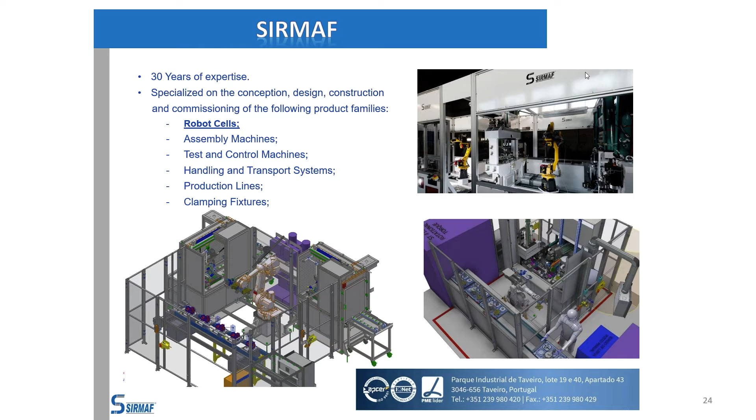SIRMAF has 30 years of expertise. We are specialized in the design, construction, and commissioning of these product families, focusing on robo-cells. These images show our solutions, their design and construction. On the next slides, I will show you some examples of SIRMAF robot cells.

In this case, this robo cell was developed to assemble, bolt and lubricate customer product. We have man/robot interfaces for loading and unloading stations, different stations for different product families. We have automatic feeding of some parts.

We integrated 3 FANUC robots. The robot brand is normally a customer specification to which we adapt, and we integrated all the programming for the 3 robots to work together. We developed the grippers to have quick changeover for different customer product families.

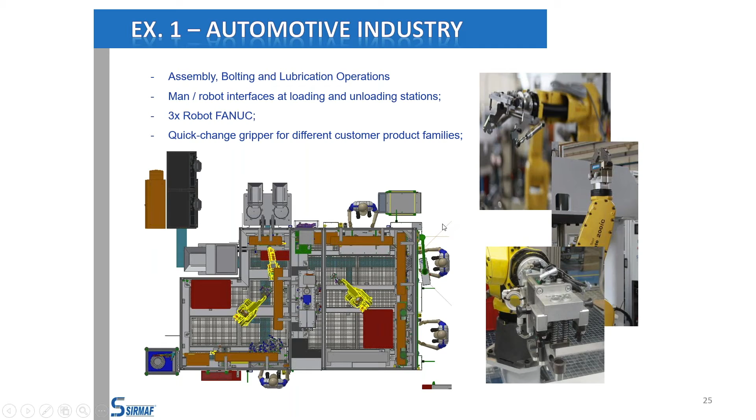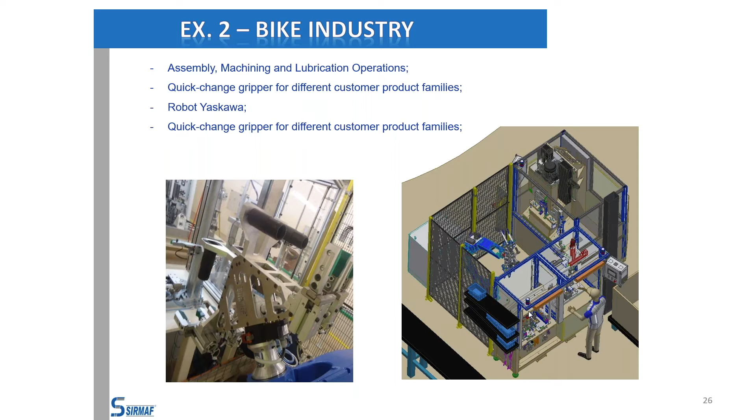On the next slide, we have an example for the bicycle industry. Here we developed it to assemble components, to machine the parts, and to do some lubrication of the component in the end. The gripper was developed to have a quick changeover for different custom product families, and we also have an interface between man and robot for loading and unloading stations.

In this example, we have a robo cell that we developed. You can see here the image of the design to do the assembly, bolting operation for the 5 wheels of a car - the 4 wheels plus the safety wheel. This was a big innovation project and a big challenge. We have a huge variety of wheels, imprecise feeding of the wheels and of the car, and imprecise positioning of the car wheel hubs, so that we can assemble with the robot in automatic all the wheels.

In this case, we developed a system where we integrated 3D vision to scan the wheels and the wheel hubs, and we automatically program the robot trajectories so that the robot can match the bolts on the wheels and the wheels on the car hubs. The solution was based on 2 ABB robots, and we integrated the cameras and the nut runners on the robo gripper.

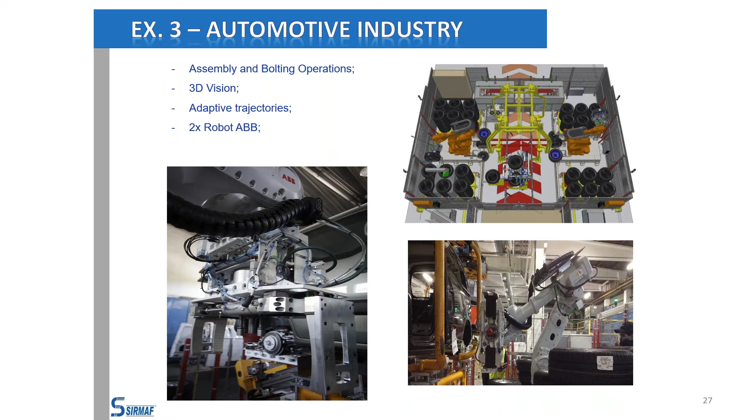Machine directive compliance is mandatory in SIRMAF's quality management system. RoboCell machine directive norms and safety solutions for RoboCells are evolving. These past years, we would like to highlight the transition that we followed, which we see as a good improvement: from hardware safety solutions to safety by software, using safety PLCs and software like SafeMove, in this case for ABB.

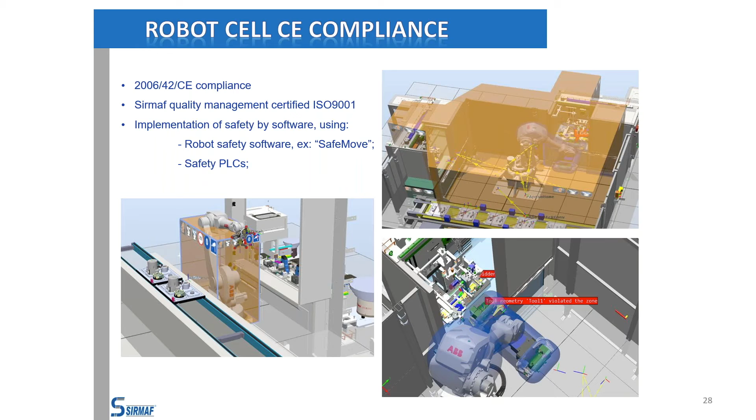These being examples of what we do at the moment, I'd like to also share with you our vision for the future. Aligned with Industry 4.0 main guidelines, our vision for SIRMAF Production Systems 4.0 is based on the integration of machines, robots, vision systems and AGVs with a modular concept for safe, flexible and connected solutions, reducing customization to product, machine and MES interfaces and specific customer requirements.

Also, with this, opening new opportunities to change to a new revenue model like machine as a service is something that we are quite interested in.

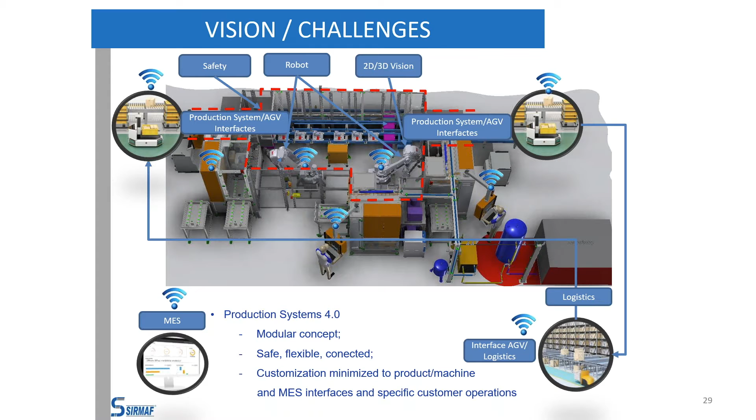Thank you very much, João. This was very interesting. And now is the moment to give the floor to our next speaker, that is Amiral Technologies. Hello, Katia. Hello, everyone. Hi, Mira. My name is Katia Hilal. I'm founder and COO of Amiral Technologies.

I'm here to present to you our solution based on a predictive analytics technology for blind failure prediction. We come from public research. We bring to the market an innovative technology allowing industrials to predict failures and to enhance their production quality based on a mix of automation and artificial intelligence principles.

The aim for us is to solve the problem of industrials, which is downtime, either of production or of equipment. Today we have lean manufacturing, very short timescales for production, and business models shifting from selling equipment to selling hours of availability of the equipment. So any hour or minute of downtime leads to a lot of loss in revenue for industrials. Predictive analytics, and in particular predictive maintenance or failure prediction, reduces maintenance cost up to 40% and reduces downtime by 50%. In addition, our aim is to extend the lifetime of equipment, which of course has environmental impact.

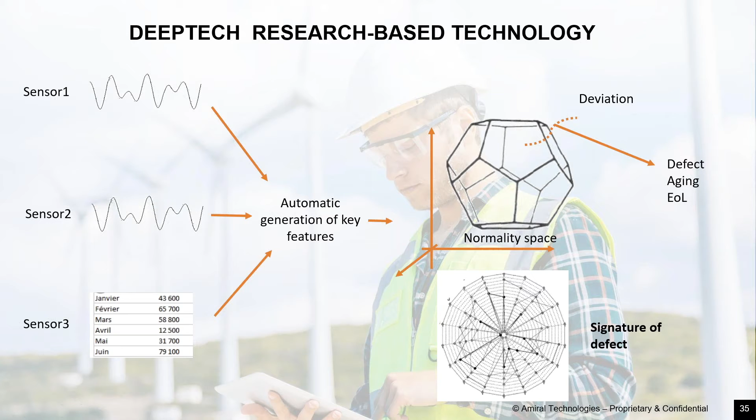So this is the principle. Going back one - what is our value proposition here? We are able to deal with complex problems with multiple types of data coming from different equipment. No matter the type of data - electrical, vibration, speed, etc. - we are able to automatically extract our health indicators.

The second value proposition is our agility and speed. We are very quick to find the solution to a specific problem because our process of generating the key indicators is automatic, and hence our generation of the prediction model is also automatic. The model we generate is easily integrated into our customers' processes and platforms. It can run on our cloud, on the customer's cloud, or on premise. The interface we supply does not require any coding, so domain experts and operational staff can use it very easily.

Unsupervised learning, meaning learning without historical data of failures, is very powerful for our solution. We have proven performance on different use cases where our rate of prediction of failures was higher than 96%, even going up to 100% prediction depending on the use case, with a low level of false alerts.

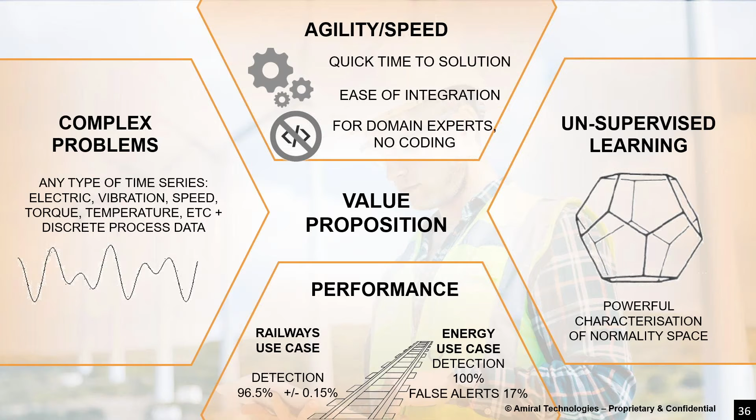Our technology can be applied in multiple cases - of course failure prediction, but also non-destructive testing, for example testing of infrastructure and testing of parts of equipment using non-destructive methods. We also apply our technology to produce prescriptive maintenance.

So what is prescriptive maintenance? Today you have three types of maintenance that are known. The first is curative maintenance, or after-the-failure maintenance. The second is preventative maintenance, where you replace pieces on a regular basis - a costly method of avoiding failures. The third is predictive maintenance, where we predict the failure before it happens.

The fourth one, prescriptive maintenance, is where we tell you what type of maintenance to do now to keep your production at the highest level of quality. Provided we have some data, we are able to tell you that you need to do maintenance operation number 1, 2, or 3 to keep your production quality at the highest level. The third use case is quality diagnosis for manufacturing.

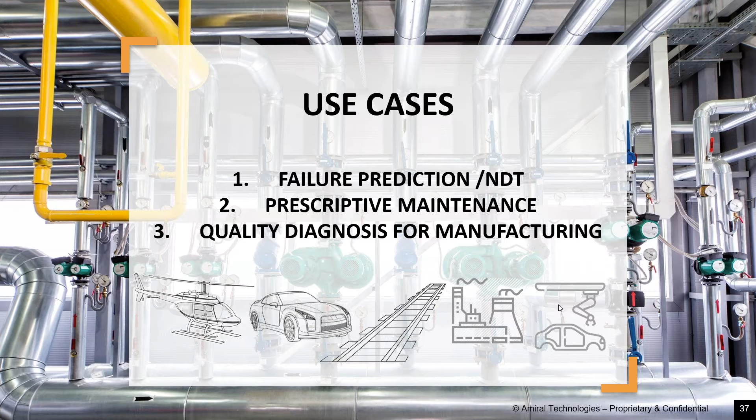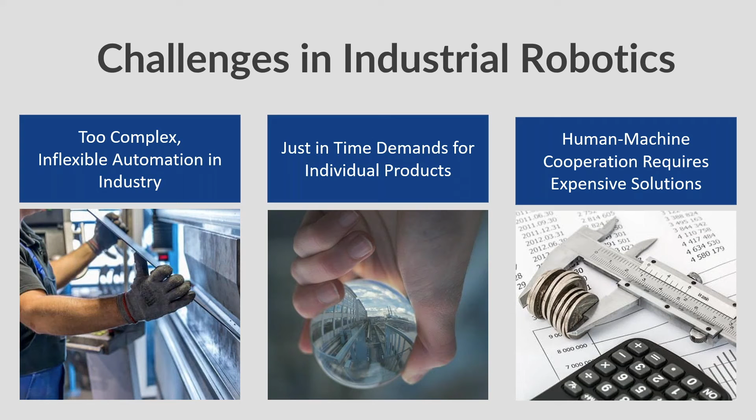And our approach, you can see in the next slide, goes in a different direction, that we try to use a personalized robot, which is soft covered, which is very adaptive to persons. It can understand voices, it can recognize faces, it can touch people in a safe manner without any fences. And this approach is an option for applications which do not need all the demands of a high price solution, but just do it the easy way.

So we have that for industry, collaborative robotics, but we have specialized applications also on service robotics fields like care robotics with the Leo robot, and then also in gastronomy, where our robots are used also to prepare drinks, serve drinks, and other work to do in gastronomy.

Today we talk a little bit more about industrial applications, but it is very close to the service applications nowadays, and therefore I think there is a big overlap.

In the next slide, you can see what are the demands and the application possibilities we can serve. So in industry, it's about safety, but often, of course, also about speed and forces. And here we have to say, if it's highest speed and big forces, our F&P robots are probably not the right solution. But often you have to wait for processes, or it is food which is not able to be moved extremely fast, or many other reasons.

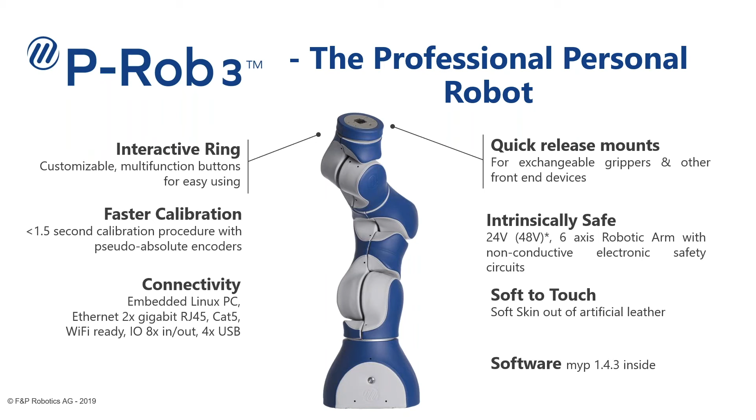Intrinsically safe. We have 2 versions. The 24-volt version is very easy to have installed because it does not need any fence and not risk analysis. So thanks for your attention.

I hope you have something in mind which our P-Rob Leo solutions could serve. Thank you very much, Hans-Rudi. It's really interesting, the different applications and the technology. And we pass to our next speaker, Terakalis.

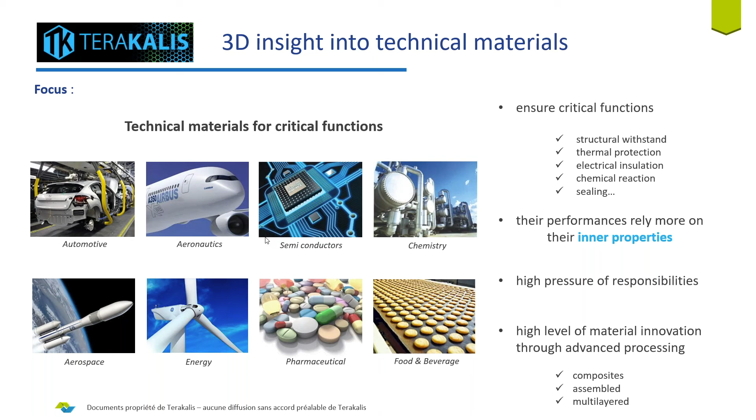Next slide, please. So knowing the context of our focus, our field, which is technical materials and the manufacturing process, the situation today is that the processes to transform or assemble such material are not well understood and even not well controlled. And this is a key negative point in order to allow fast adaptation to market demand or to changing environment.

So this is like an obstacle, a hurdle today to deploy agile production in the field of this industry to manufacture technical materials. And the main reason is that today there's a lack of flexible devices that are able to analyze the inner properties of material on real industrial parts. That means real industrial parts are many times 3D, thick and large size.

And also the real industrial parts are the parts which are being produced, not the part extracted or built or manufactured for lab use. So we are talking about the real industrial part which is produced on a production line. And also another point, if you want to better understand your part, you need a large scale of data about what you produce, and this is a lack also today.

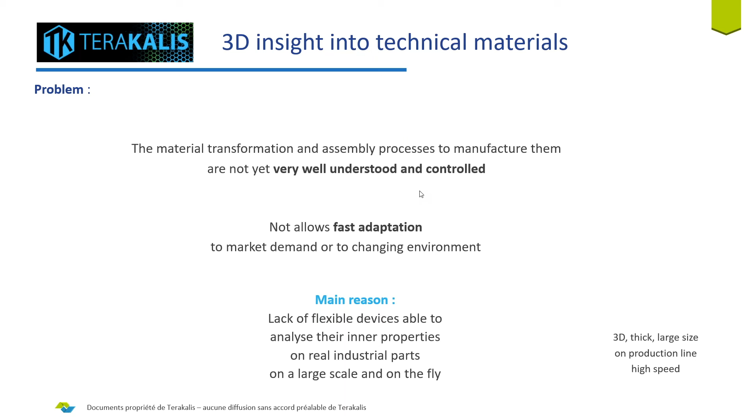The solution I would like to propose is a robotized inner inspection of polymer, elastomer, and ceramic parts, which is the scope of material where our technology could play a role. And also for this material, including what I call advanced processing today, because when we are talking about advanced processing,

like composites or even package materials or multi-layer material, this advanced processing creates some difficulty for the analysis. And the technology we developed today is adapted to the new complexity induced by such advanced processing. For instance, if we are talking about composite material, it creates anisotropy issues that you need to face with your technology in order to detect defects or analyze and control inner properties inside the material. And we have developed such a solution able to deal with anisotropy of the material.

So the solution is based on the association of robot and what we call terahertz vision. It's a new range of electromagnetic waves today, which allows us to reach the performances and the assets that we display in this slide. That means non-destructive technology, high capacity of penetration - I'm talking about few centimeters inside material - fast and accurate imaging, and thickness measurements.

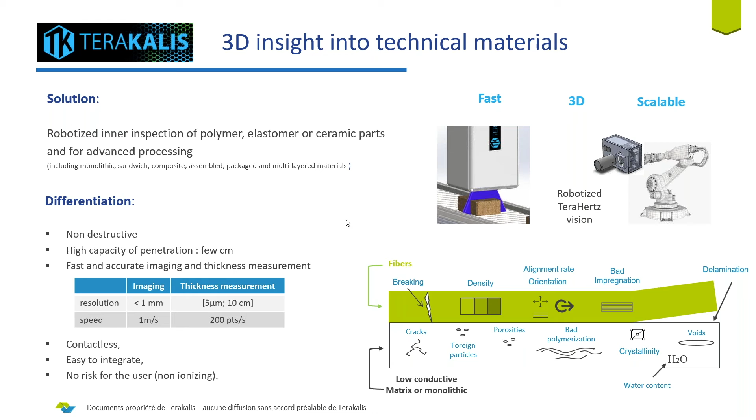And here at the right side of the slide, you can see the type of defect or properties that we can measure and control inside a material, as an example.

So to make a synthesis of what we can bring in terms of value, we have selected two use cases. The first one is that this technology could help you get more knowledge about your manufacturing process through a learning campaign based on inner properties data acquisition.

That means many times we face industrial customers who are not able to describe what the inner defects are that they could have in their material, or where they are localized. Even they inform us that the models they use to simulate the transformation of the material are not effective enough today for them to have a better understanding.

And the first part is that they have difficulty knowing the real impact of process parameter variation when generating defects or bad properties. So what we offer is really to learn the manufacturing process through a learning campaign, gathering data, and also through AI, artificial intelligence, to analyze this data and provide the customer relevant information about his material and his manufacturing process. This better understanding helps, of course, accelerate the material market adaptation.

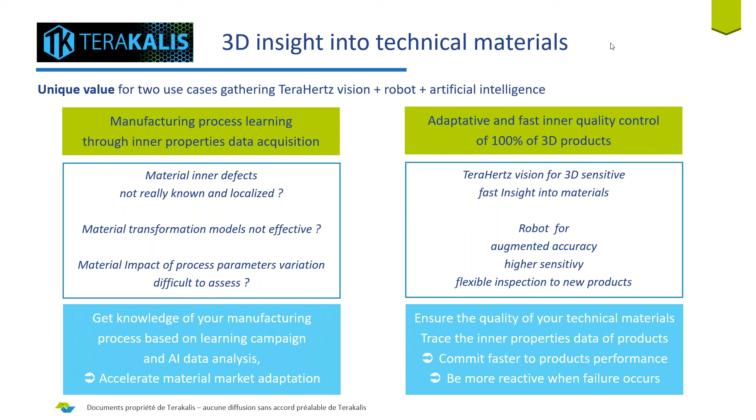So as a conclusion, we think that increasing the knowledge of manufacturing processes through inner quantitative measurement and data analysis, and through developing adaptive and faster inner quality control of 100% of the product on the industrial production line, could contribute to accelerate and support the agile production of our technical materials.